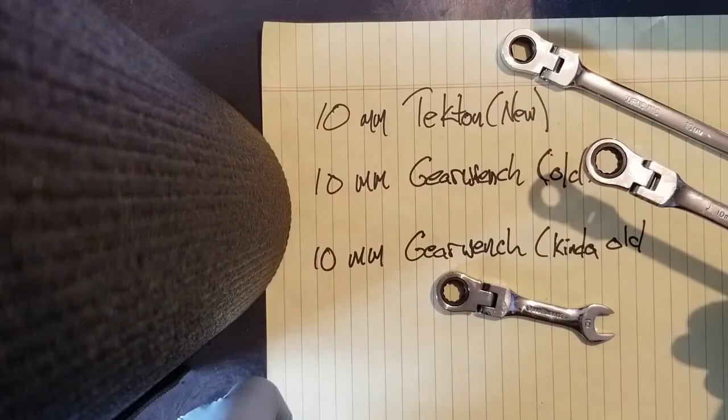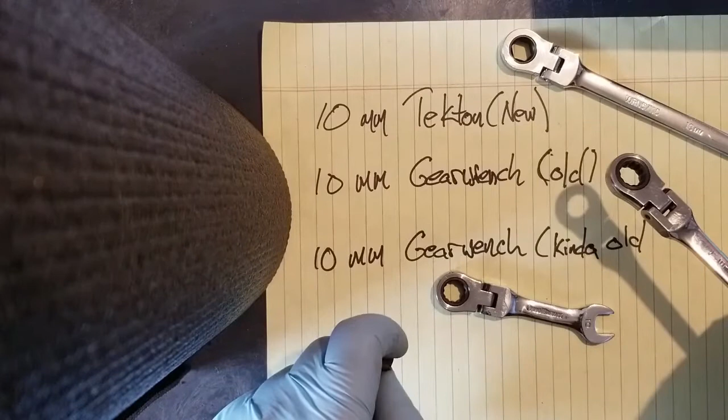That's stupid. The other thing people will do is, well, let's get the best case scenario for all of these guys. Get a brand new shiny grade 8.8, or in metric it's class. I'm sorry, no, it's grade 8 in SAE. In metric, it's 8.8, or 10.9. You can flame me down in the comments.

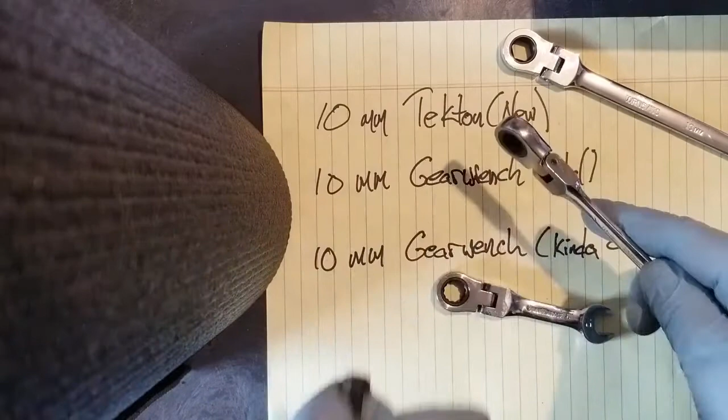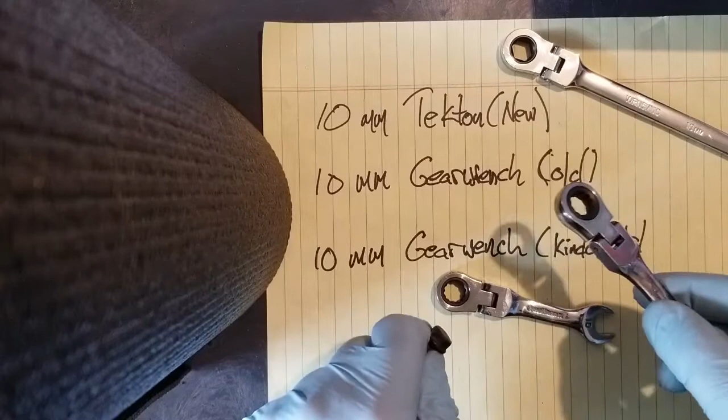What I want to do here is actually look at just some practical stuff. How a tool works. I mean, a lot of people say how it feels in the hand, or how it works. And there are a few little kind of tests that I've been doing lately to see what wrenches work and what don't. I was fortunate to get some secondhand Snap-On combos that really opened my eyes to the difference between a good wrench and a bad wrench. Not saying these are all bad wrenches. Actually, I'm going to say one kind of sucks.

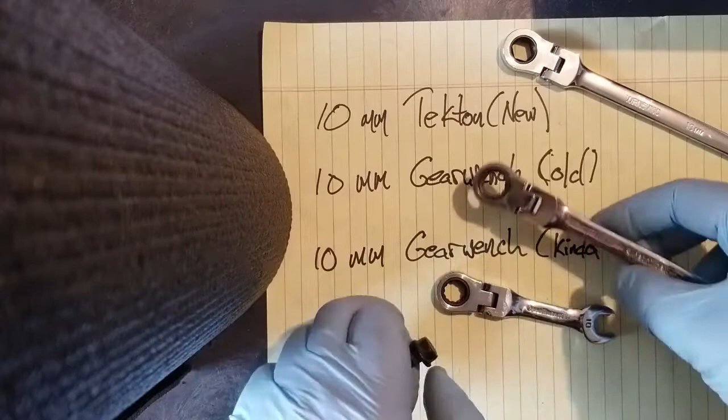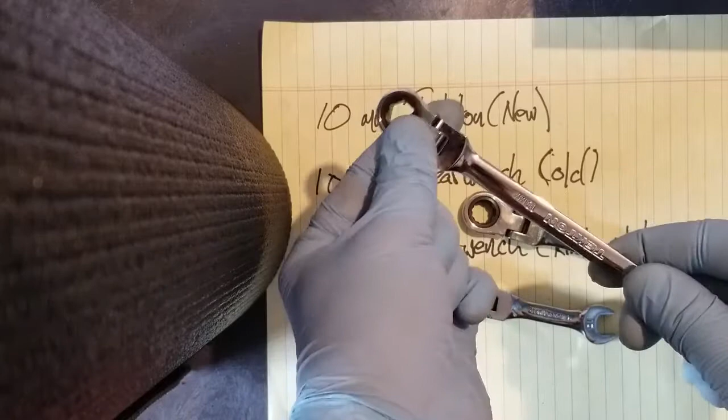What I'm going to do today is we're going to look at this brand new Tekton 10mm 6-point ratchet flex head. I wanted to check these out, so I just bought the 10mm. I've had forever the first ratcheting box wrench that I bought at Lowe's when they were stupid expensive. But this is a GearWrench, Classic GearWrench 10mm flex head. These wrenches are amazing. I love these things.

There are some jobs on some newer Volvos that are supposedly really hard. This flex head turns it into a joy because you can just bend it and you can get behind things, do whatever you want. I mean, it's perfect. It's great. Next tool I have is the same tool, but it's a Stubby that I got just for reaching down in there and loosening belt tensioners and whatnot.

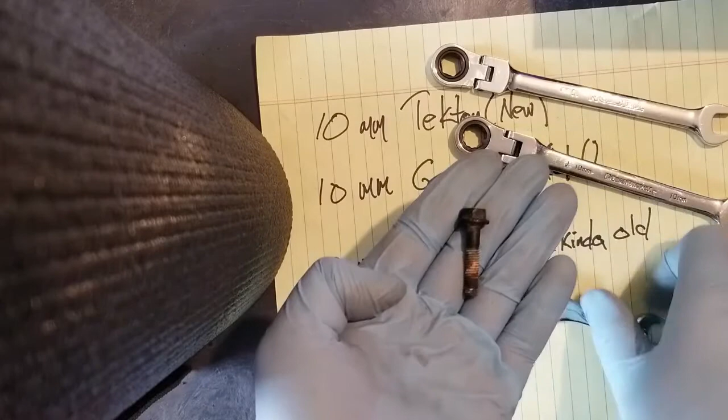So the test that I'm going to do is we're going to listen to the ratchet, and we're going to see how well a used fastener stays in these heads. If I zoom in on this guy, you'll note that no modern wrench is a pure hex anymore. The reason for that is they all take advantage of the flank drive that Snap-On patented in the 60s, expired in 88. Everyone else can use it.

And so what that means is that these are all bowed. Each edge is bowed, and there's actually a little cutout for the point. And what that does is it keeps the point of the fastener from getting rounded off by the hex of the wrench. And so everyone's taking advantage of that.

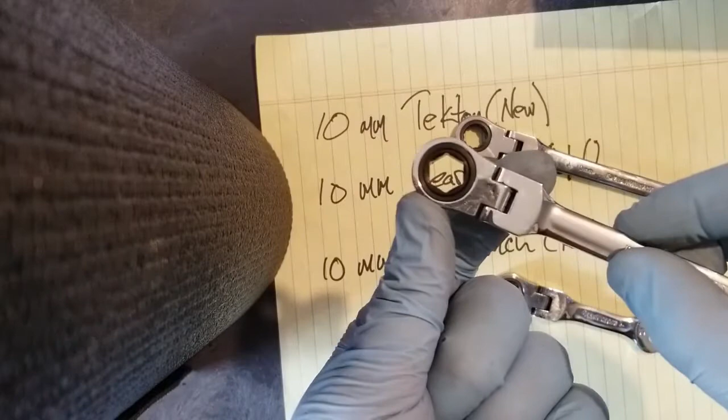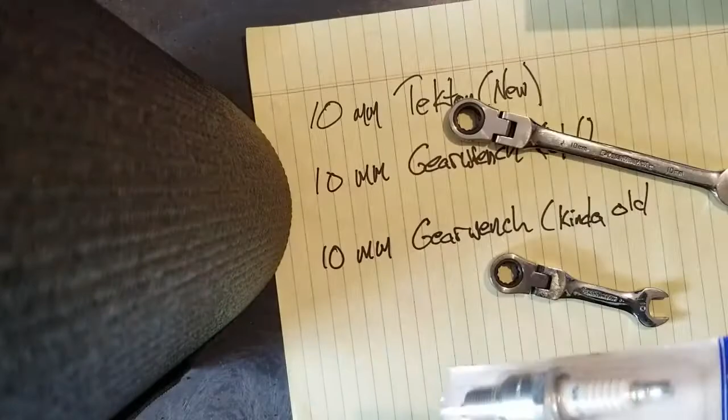Let's see if we can zoom in here. I don't know if we're gonna be able to focus. Let's try this. Let's see if we can, whoop, everybody's moving. So let's see. And you can kind of see that cutout there.

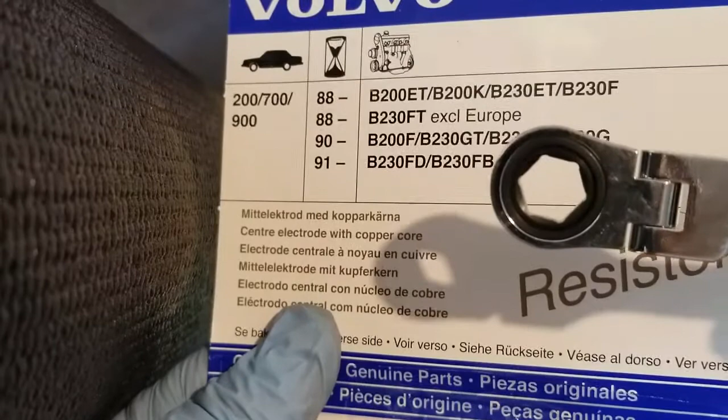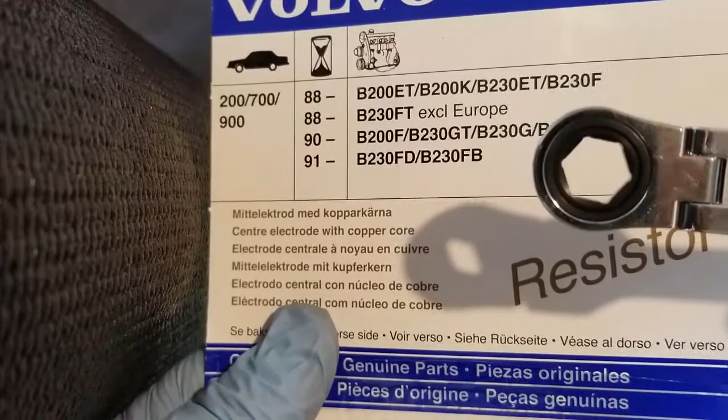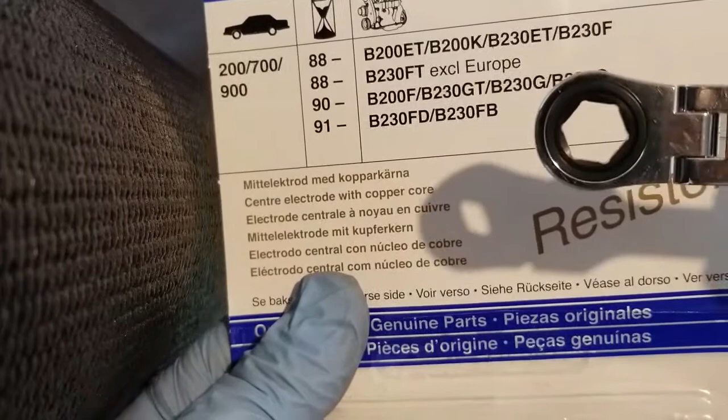So when people use calipers to try and measure the precision of a wrench, it's a crapshoot because it depends on where they're measuring. It's basically a rounded thing. The profile actually makes a huge difference on how it grabs the head of the fastener. But what you're going to notice is that when people use calipers, their results are meaningless. I mean, look at the cutouts for the corners of the fastener to not get grabbed. It's almost irrelevant how big those are.

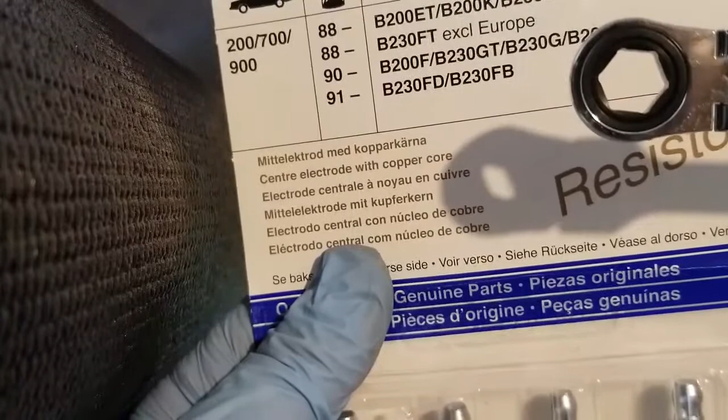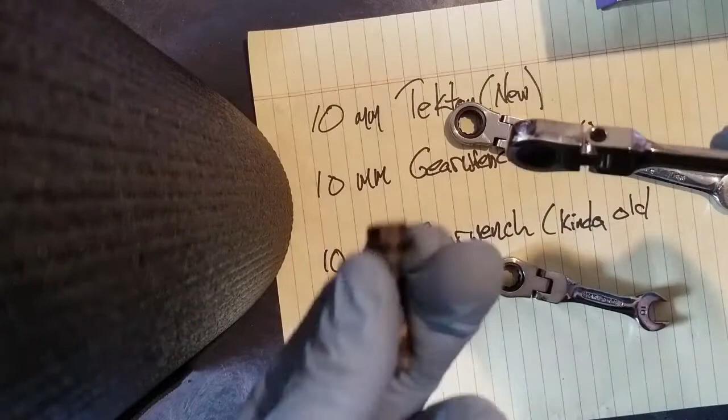So that doesn't matter. So off my high horse, there's a lot of information on YouTube about wrenches, but they're just not practical. So one of the tests I kind of developed is to say, hey, why use a brand new fastener that you just got? Because that's not what you're going to see in the field. You're not going to see a brand new fastener. I believe this is a water pump fastener off a 4-cylinder Volvo engine.

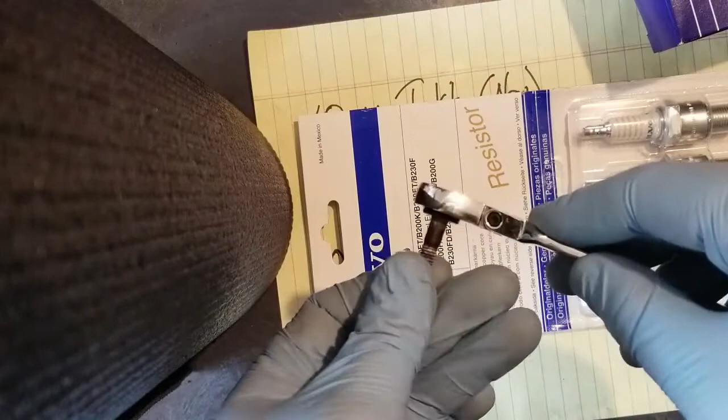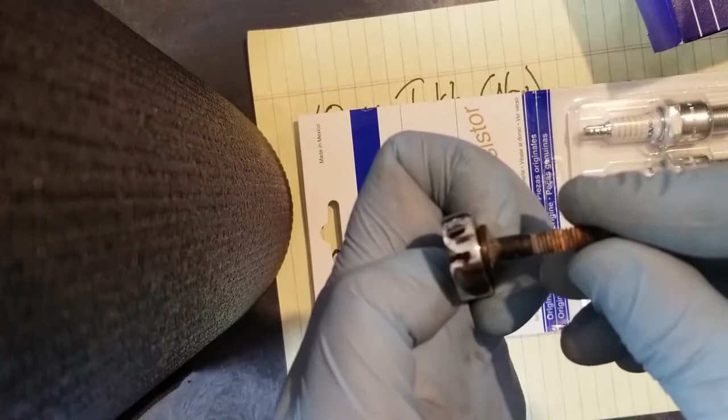And the test that I use, let's pull this out again, hopefully this will work. I like putting the fastener in and trying to rotate it off center. So if I can rotate that off center, and if you zoom in here, if we'd focus, you can kind of get a feel for how much deflection you're getting out of this fastener.

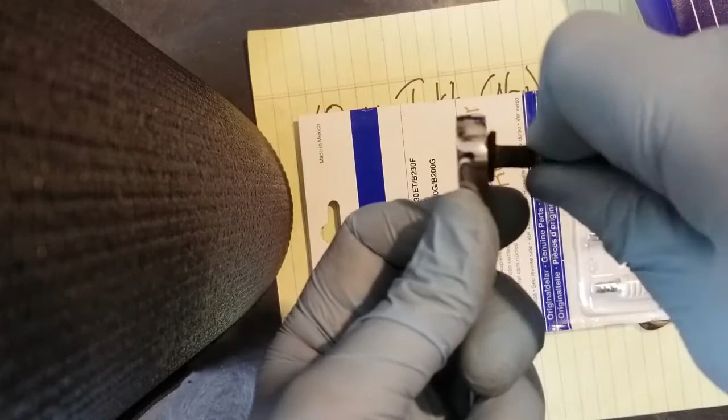So this Tekton wrench is actually really tight. Got it brand new today. Used it for 4 license plate fasteners, and it's pretty good. What I don't like is that if I push in or pull, this thing is so graunchy. And if I pull in, I can actually sometimes get it to go backwards a tooth. It's just such, I mean, it's almost unusable.

It takes so much force to turn this that even the old trick where you put a finger over the wrench while you're tightening it, it's not enough. This is a crappy eaten up fastener. So it passes the how well does it grab test.

And the reason this test is important is that when you have the wrench on a fastener, deep in the bowels of an engine, you want it to grab that fastener and not flop off. And it's positive. Then you can just put the effort into turning the tool and getting the fastener out. So that's why this is important. If a wrench grabs the fastener well, it saves you a ton of work. You don't have to put a little English on the wrench, kind of twist it so that it doesn't pop off.

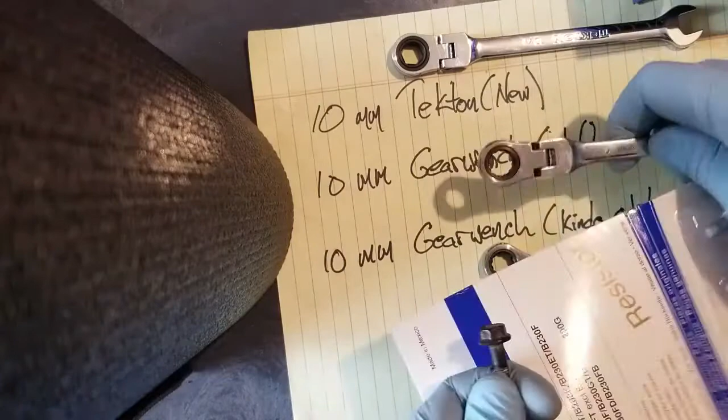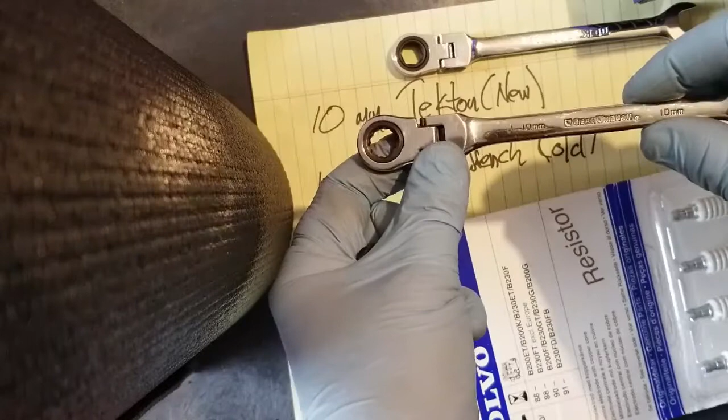So let's contrast this with, this should be about a 14-year-old GearWrench. One of the first ones I ever bought, and I was really poor at the time. And this was a big purchase for me, so I paid $60 for 10 to 16 millimeters. Now let's test this thing out.

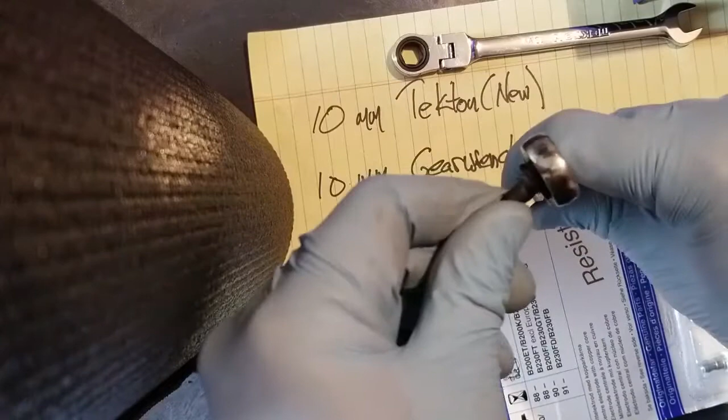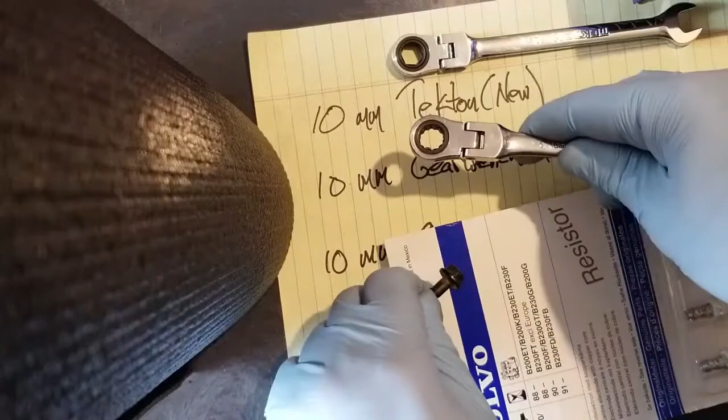This guy's gotten a ton of use, and right away, it's a sloppy fit. You can look, I can actually rotate the fastener right out of there. If I put enough English on, I can actually just twist this out, and it's a flange screw, so it's going in the same place. And yes, we're comparing apples to oranges, 6-point, 12-point, but the 12-point's got the disadvantage.

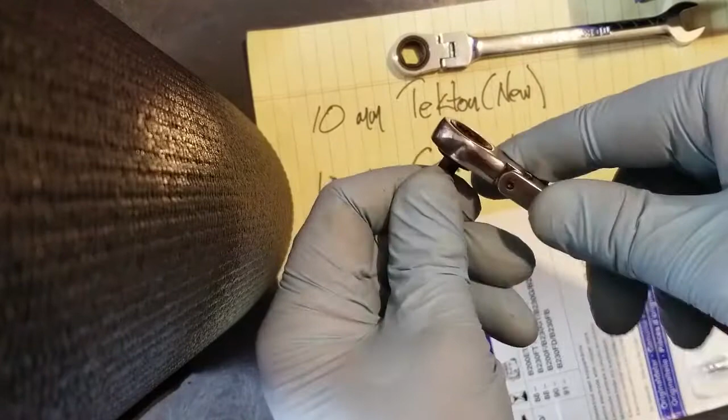On the other hand, listen to how well this guy moves. It's very smooth, so when you're trying to ratchet backwards, you're not turning the fastener backwards with it. If you push in on it or pull out and twist it, the ratcheting mechanism is just incredibly good.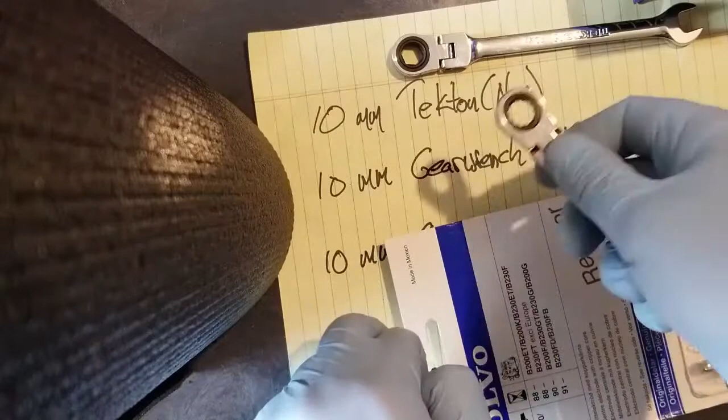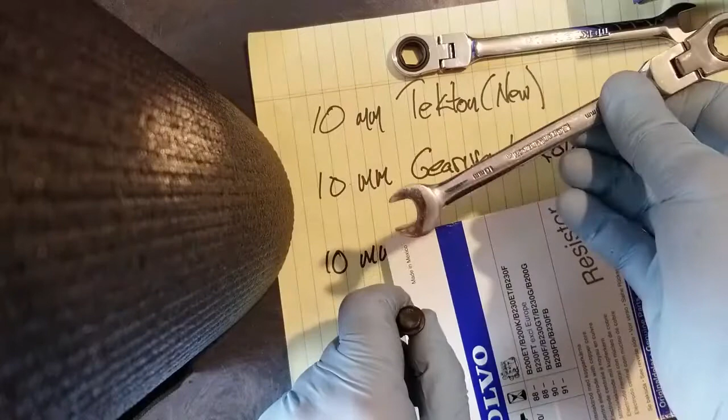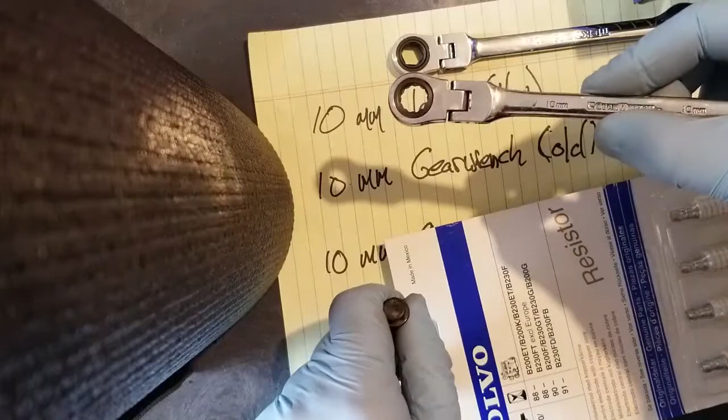This wrench being a 10 millimeter, I'm a Volvo mechanic, so this wrench gets used on positively everything. Even the open end has proven to be really good. I'd argue it's even better than our favorite Craftsman 10 millimeter wrenches when they were made in the USA. So this GearWrench being used is good on one, good ratchet, bad on the other.

It's actually sloppy. And I didn't really notice how much I was fighting this tool until I started comparing it to some other wrenches. So when you get on there, especially if you have a fastener and it's not a flange screw, and the wrench can kind of get through it, you wind up fighting to keep this on there as you're trying to turn the wrench. So not so good. But it's a nice wrench. And that begs the question.

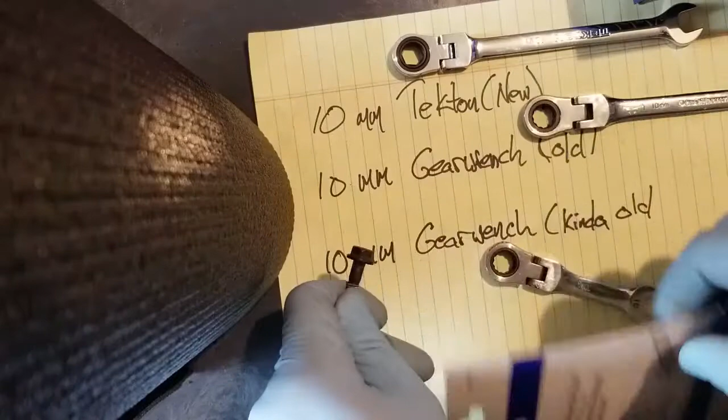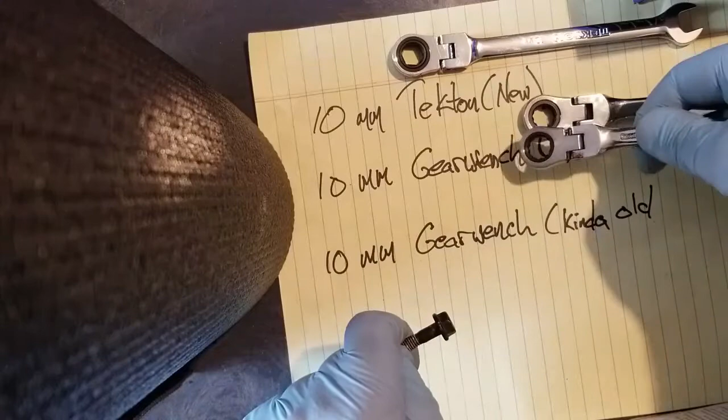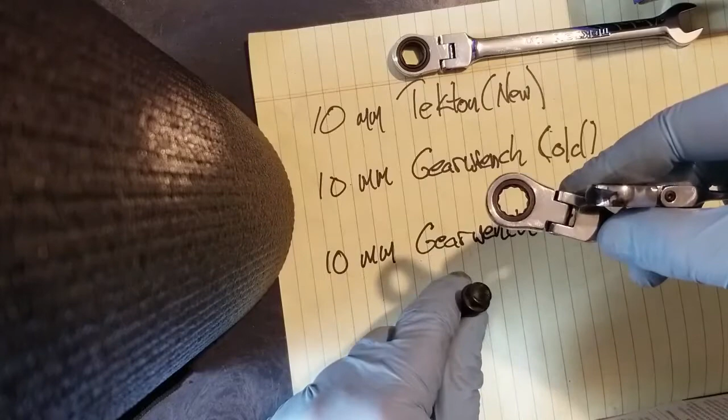So we're going to look at my Stubby, which is kind of old, but being a Stubby, it doesn't get a ton of use. Same ratcheting guts, same everything. And what this is going to show us is that mechanically, the part of the tool that grabs the fastener is simply worn out. So I'm going to do this again. So this is my Stubby.

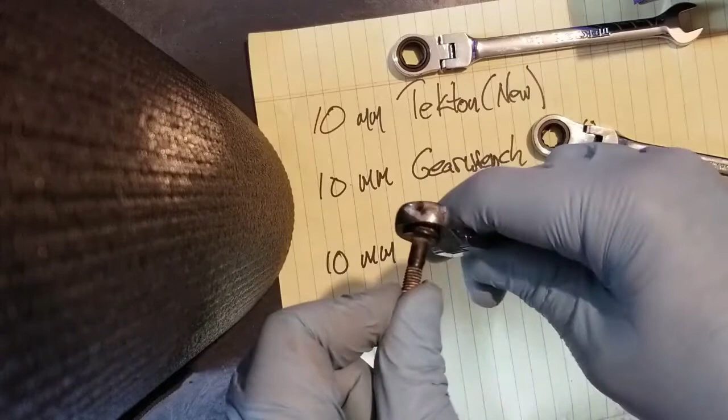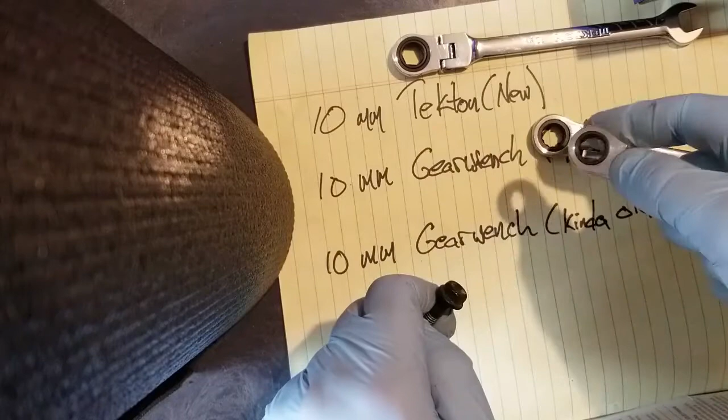We're going to pop this in, and you can see that, and again, I'm not trying to manipulate the results here. This is very grabby for a wrench. So it's doing great. It's probably the exact same part that is in this older wrench, but this wrench is much newer. So doing the work, and again, these GearWrenches are actually silky smooth.

I'm not a tool snob. I have a ton of Tekton stuff. I have Tekton impact sockets. If I needed to prove the fact that I like Tekton stuff, I could put down and prove my point with a bunch of tools. Feel free to call me out on that. But the GearWrench is much better, and this one's got some use on it. This one's been used for 4 fasteners today.

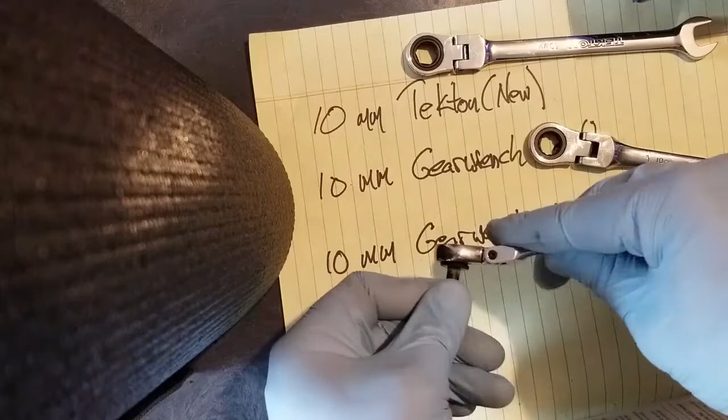But the GearWrench is just, the ratcheting mechanism is fantastic. It's a 12-pointer. It's just as grabby as a 6-point. And I mean, this is demonstrating that the GearWrench, I think, is the better tool. And they are comparable in price. I mean, this is like a $20 wrench.

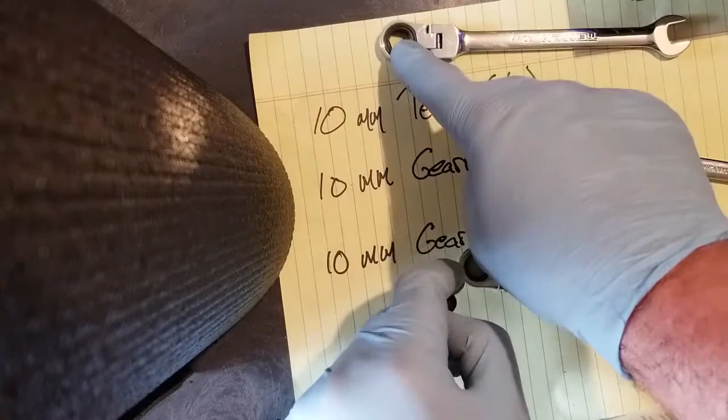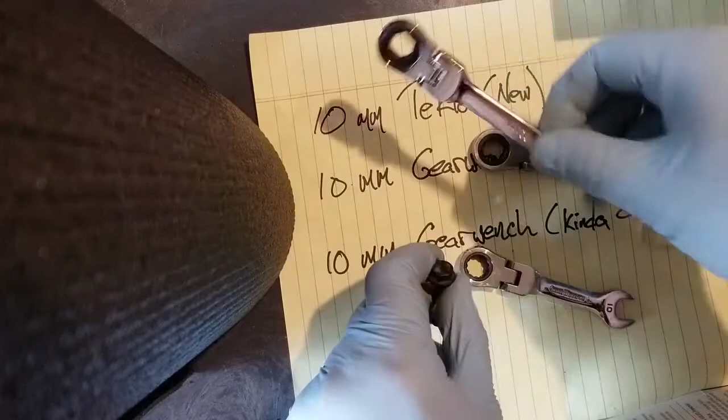I'm glad I did it, because I almost bought a bunch, because this guy's worn out. And I thought, you know, it's probably time to replace these, as they are getting a bit worn. And I decided I will definitely not be doing the Tekton route. Begs another question, actually. This is really kind of a fun one.

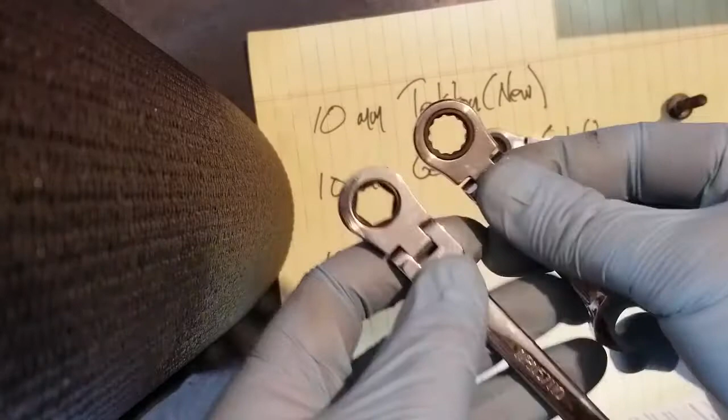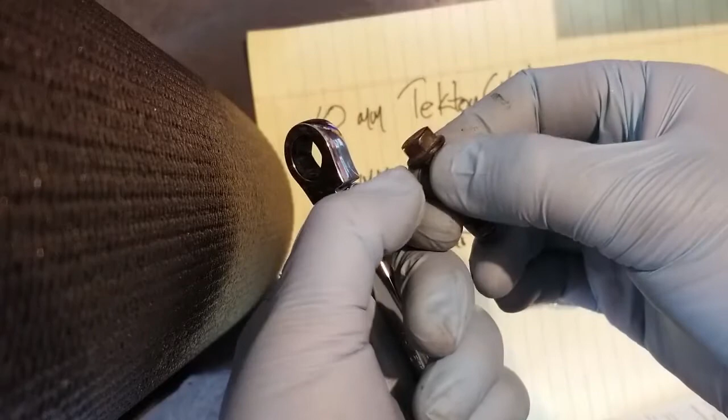So if we look at these, the way that these are set up is to, rather than grab the point of the fastener, you can't really see it on here because this is an old chewed up fastener. Since Snap-on's patent expired, wrenches are not designed to grab the point anymore. They're designed to grab the flat next to the point. I wish I had a clean fastener to show you.

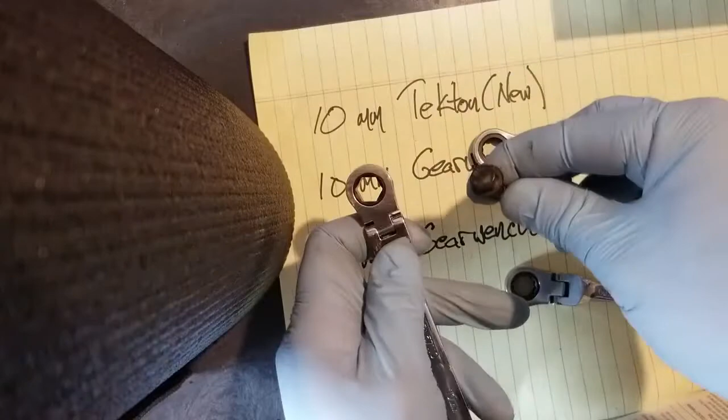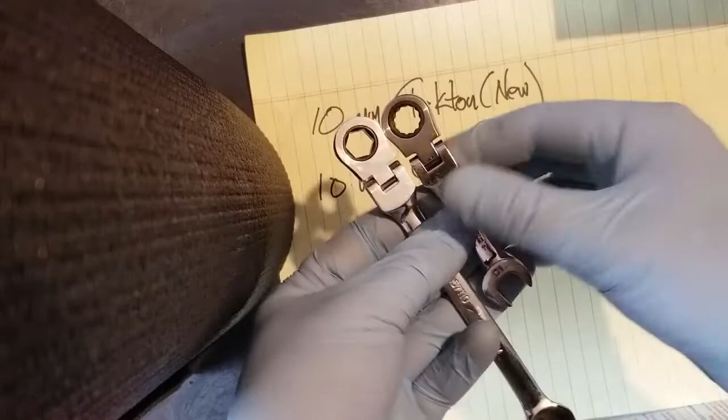And since that's the case, I've had an old friend who was a professional mechanic for years, and he's a big fan of 12-point tools. And I always questioned him on that until I realized that these tools are grabbing the edge, the flat next to the point. So how many points you have is kind of redundant, since the tool is just grabbing the flat next to the point. It's not grabbing the point. So it starts to kind of become a wash as to whether you're going for a 12-pointer or a 6-pointer.

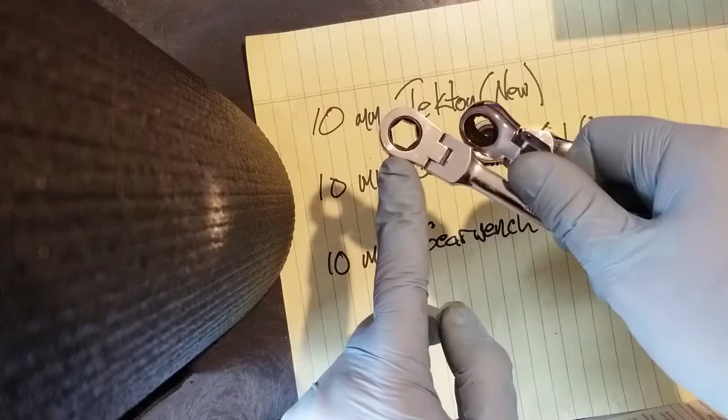If we're getting into shape analysis here too, there are a lot of different shapes for these kind of off-point drives. Some are better, some are worse. Snap-on is amazing. I can't afford many of their tools, but I have some of their combo wrenches, and they are unbelievable. So far, very few tools are able to copy that, at least in a box-end wrench. But enough off my high horse.

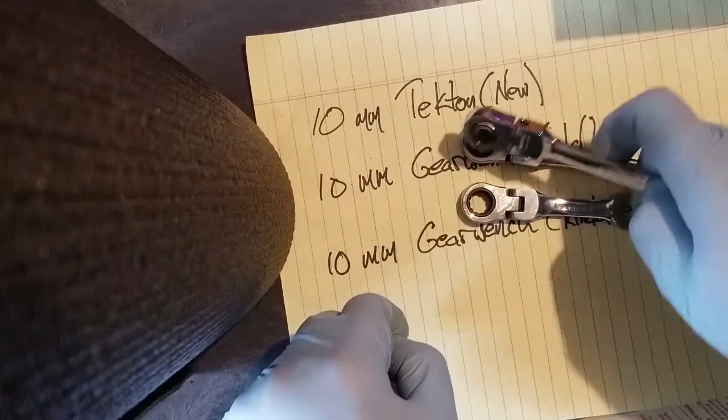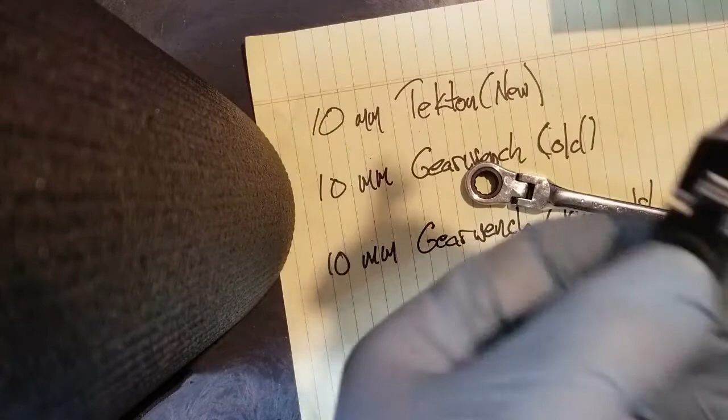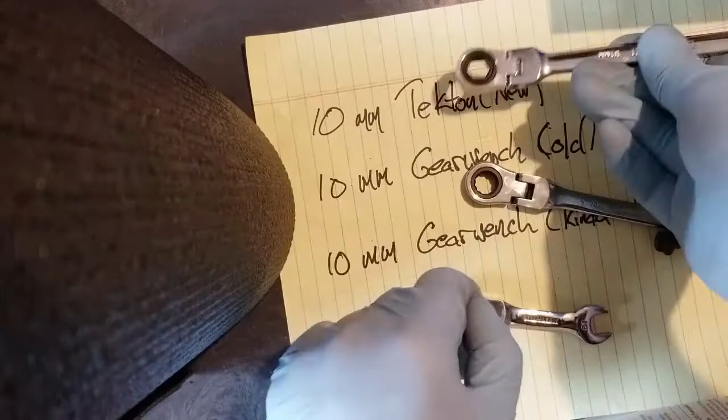So what can we say in summary? Out of the box, Tekton is just, I don't know, I was surprised, it's actually really hard to rotate this. And listen to that. I mean, it was popping pawls on me, like going in reverse by accident. So I'm let down by this Tekton offering. I have tons of Tekton stuff. Love a lot of their tools.

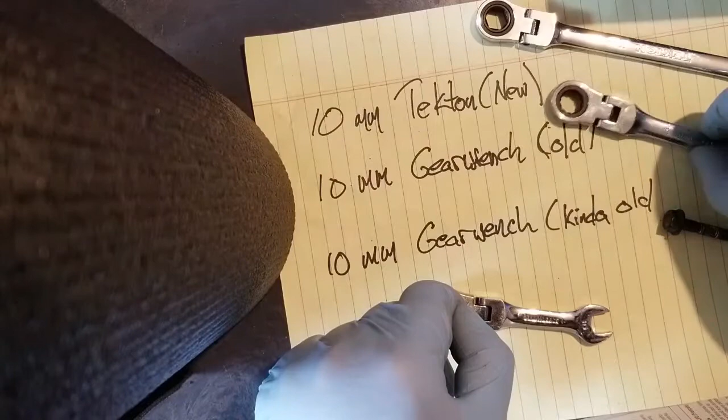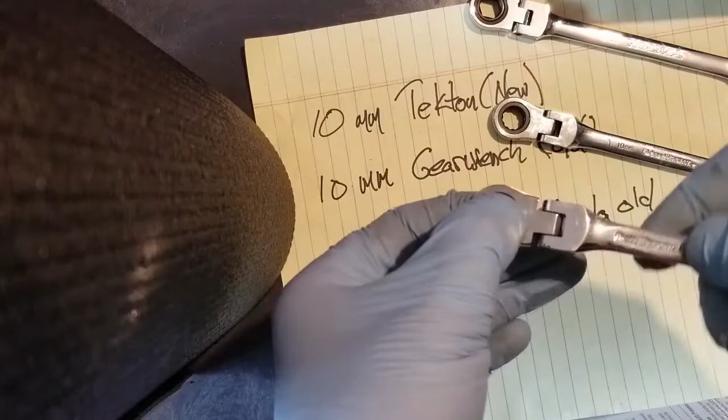GearWrench, this old 10mm is simply worn out. The ratchet mechanism, if you listen to that, there's actually not much backlash in there, or whatever the engineering term is for backlash in wrenches. It's pretty good, but mechanically, it's worn. This is a much newer 10mm, just a stubby. And if I turn it, same thing. You can just hear that, especially if I twist it in my hand. It still sounds good. Fastener goes in tight.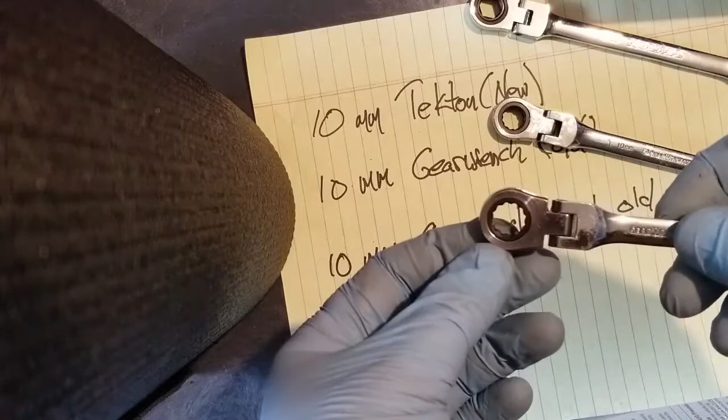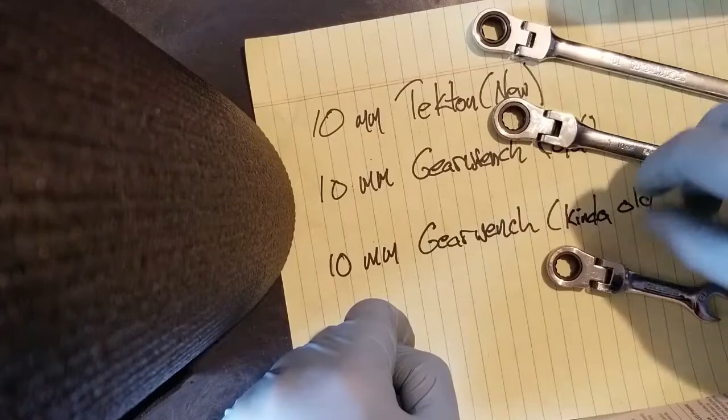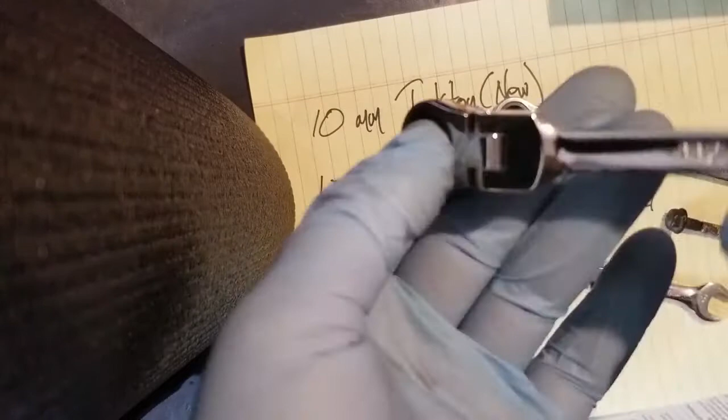I think 12-point versus 6-point is probably overrated. And I used to be a diehard 6-point wrench guy until this winter, when I really started looking at wrenches. And my mind was kind of boggled when I realized that a good 12-point can be better than a bad 6-point. But again, listen to this. It's just grunching. It's not even consistent. And if I twist it, yeah, yuck.

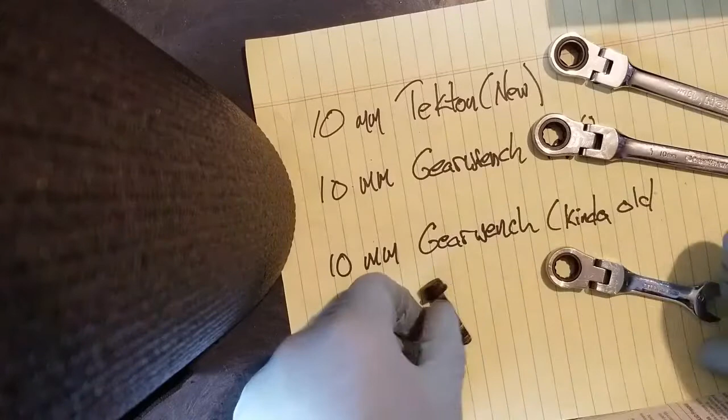All right, so I'm sure this is going to be a flame war or something, but that's my take, and you're welcome to disagree.